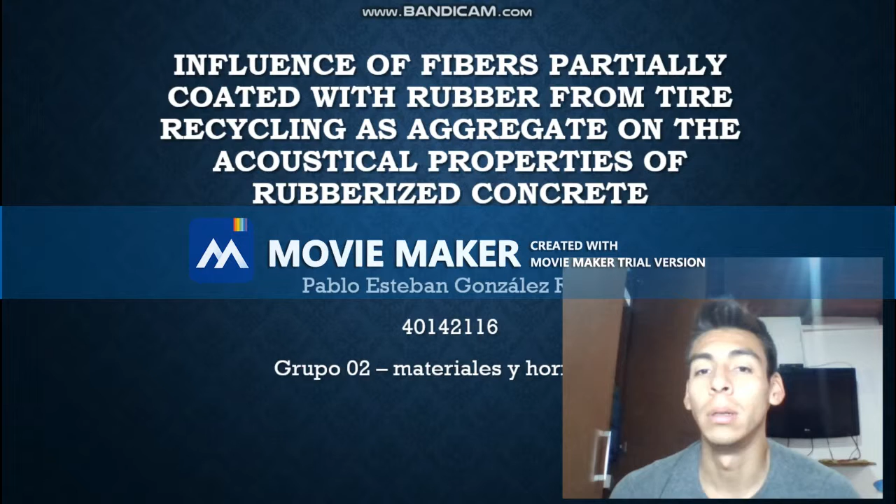The paper is Influence of Fibers Partially Coated with Rubber from Tire Recycling as Aggregate on the Acoustical Properties of Rubberized Concrete. The aim of this study is to analyze the main parameters that influence the acoustic properties of lightweight concrete containing high volumes of recycled rubber aggregate.

Concrete specimens were designed with 0 and 100% substitution of the coarse aggregate by two different rubber aggregates from recycled tires, which is up to 60% of the overall concrete volume fraction. To evaluate the influence of the external texture and the direct contact of rubber concrete, panels with different surface finishes were cast.

Crumb rubber, CR, and fibers partially coated with crumb rubber, FCR, have been studied for sound barriers. FCR are composed of steel and plastic fibers mixed with small rubber particles from recycled tires and obtained during the granulation process.

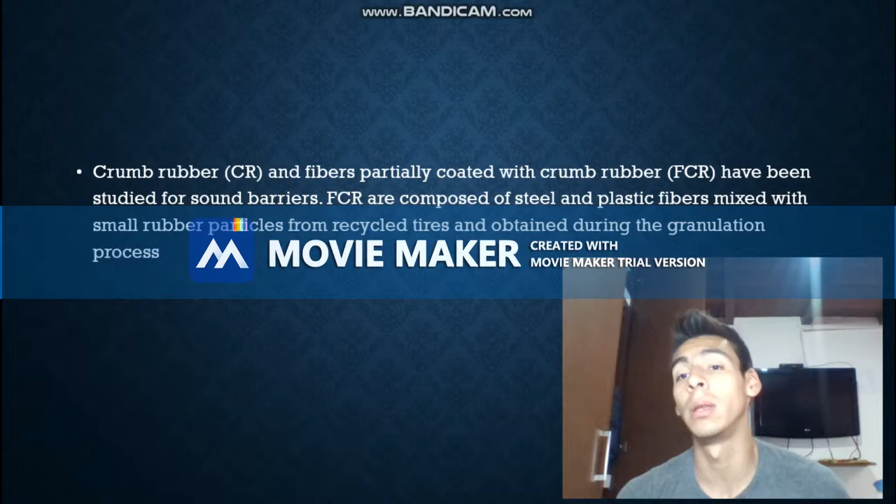The materials used for the experimental work include Portland cement with a nominal resistance of 42.5 megapascals, specific gravity of 3.18 grams per cubic centimeter, Blaine fineness of 3750 square centimeters per gram,

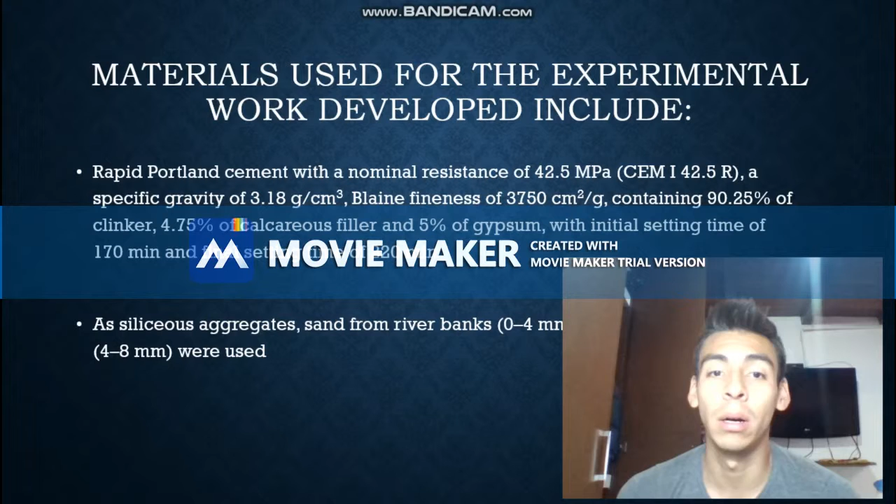90.25% of clinker, 4.75% of calcareous filler, and 5% of gypsum, with initial setting time of 170 minutes and final setting time of 220 minutes. The mechanical properties of the hardened concrete with CR and concrete with FCR have been analyzed.

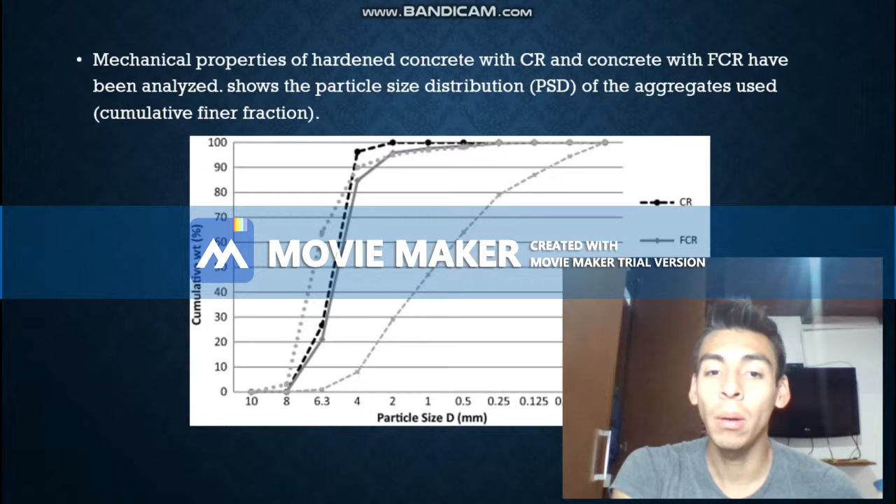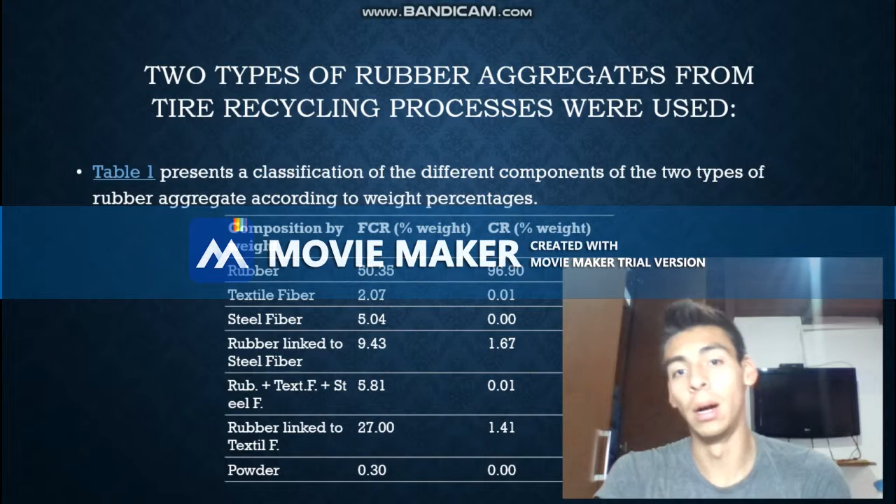This shows the particle size distributions of the aggregates used, cumulative finer fraction. The first axis is cumulative percent, the second axis is particle size in millimeters. Two types of rubber aggregate from the tire recycling process were used. The table shows the FCR and CR in percent.

Nominal density of siliceous aggregate was 2.61 grams per cubic centimeter, CR 0.19 grams per cubic centimeter, and FCR 1.10 grams per cubic centimeter. Obtained with a helium pycnometer from Quantachrome, the apparent density of the coarse aggregate was 1.75 grams per cubic centimeter, and of the fine 1.73 grams per cubic centimeter.

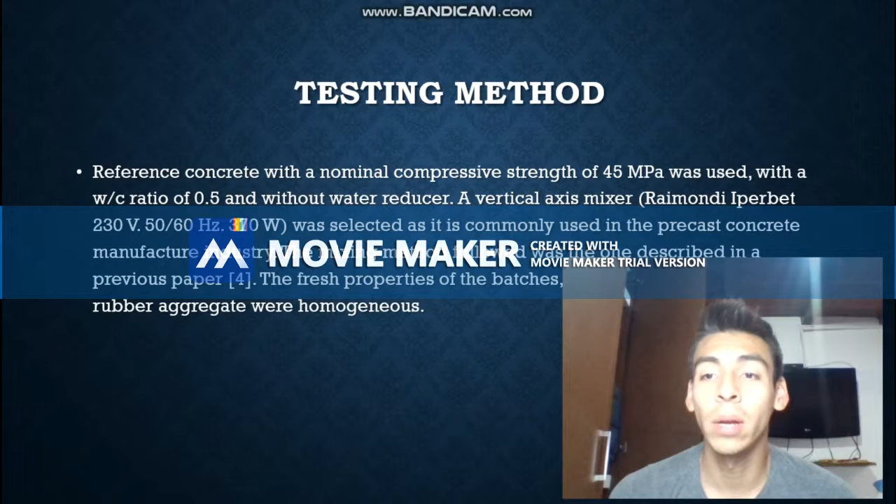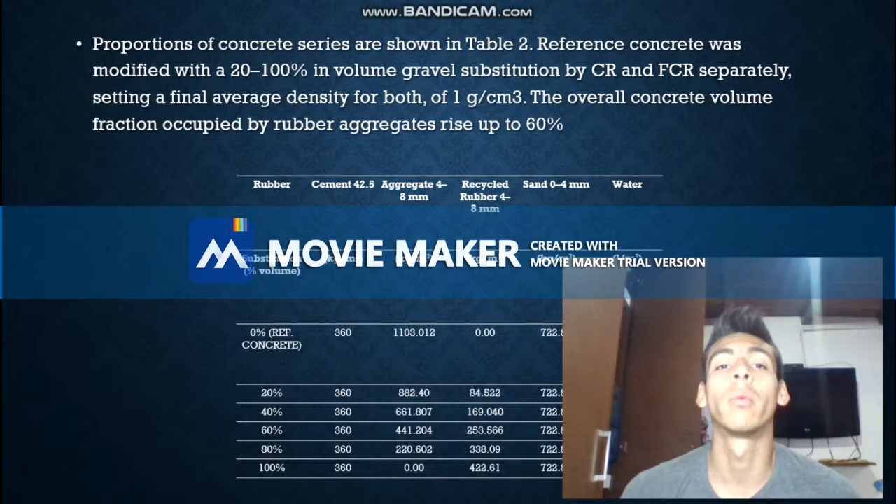Proportions of the concrete series are shown in table 2. Reference concrete was modified via 20 and 100% in volume substitution by CR and FCR separately, setting a final average density for both of 1 gram per cubic centimeter. The overall concrete volume fraction of rubber aggregate could be up to 60%.

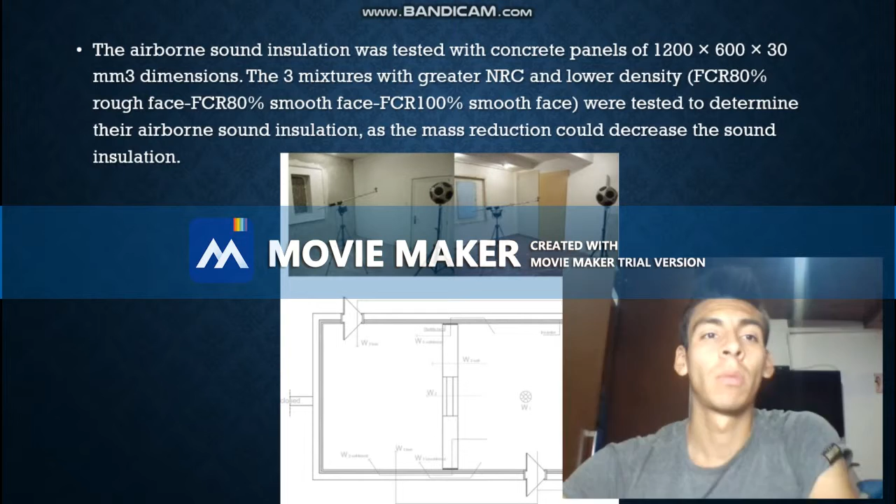In the picture is the texture: the first texture and second texture. The airborne sound insulation was tested with concrete panels of 1200 by 600 by 30 millimeters.

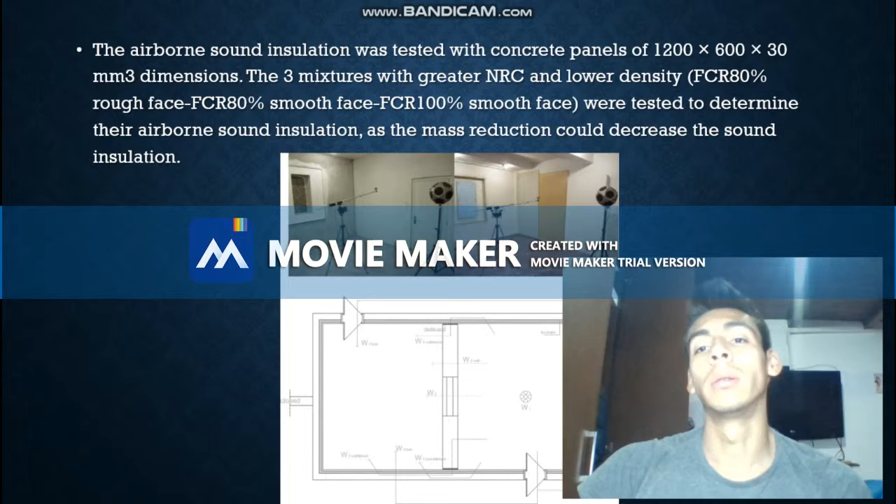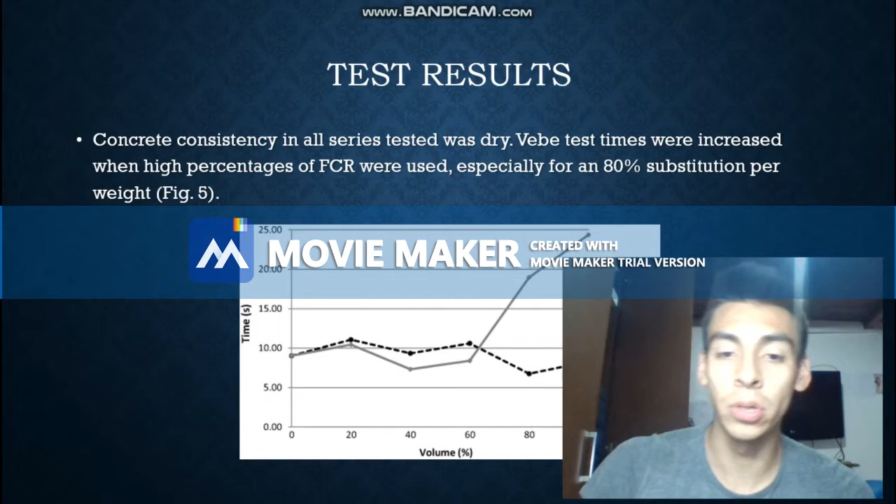The three mixtures with greater NRC and lower density, which thus determined the airborne sound insulation, as the mass reduction decreases the sound insulation. The resulting concrete consistency in all series was dry, and the VeBe times were increased with percent of FCR, especially for an 80% substitution. In figure 5, the first axis is time in seconds, the second axis is volume percent.

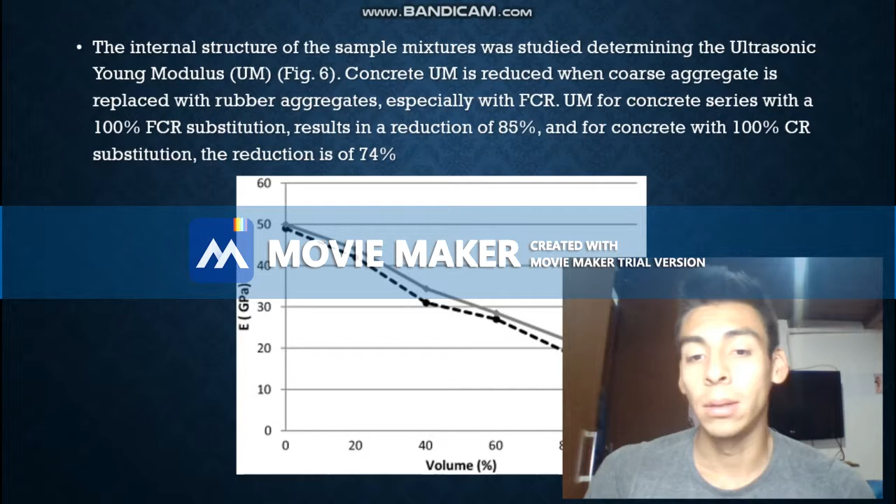The internal structure of the sample mixes was studied to determine the ultrasonic Young's modulus. Concrete modulus is reduced when the coarse aggregate is replaced with rubber aggregate for FCR concrete series, while 100% FCR substitution results in a reduction of 85%, and for concrete with 100% CR substitution, the reduction is 74%. In the graphic, the first axis is elastic modulus in gigapascals, the second axis is volume in percent.

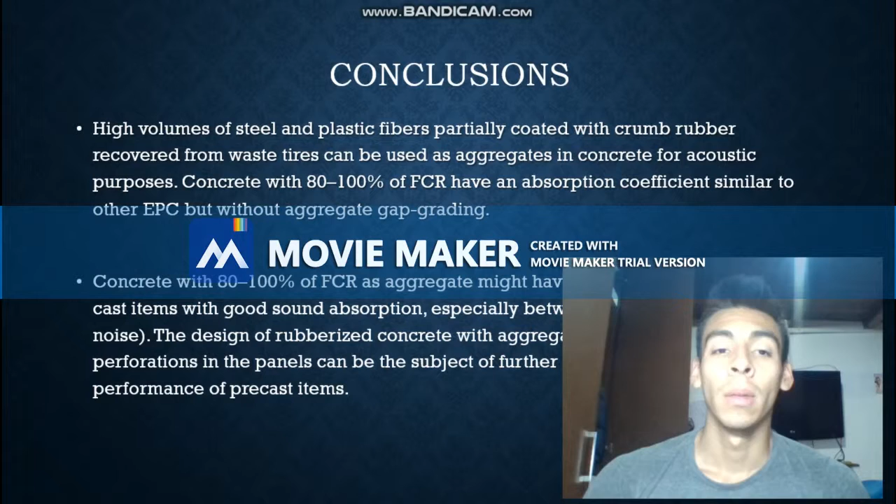The conclusions: high volumes of steel and plastic fibers partially coated with crumb rubber, recovered from waste tires, can be used as aggregates in concrete for acoustic purposes. Concrete with 80 and 100% of FCR has an absorption coefficient similar to other EPC, but without aggregate gap grading. Thank you.